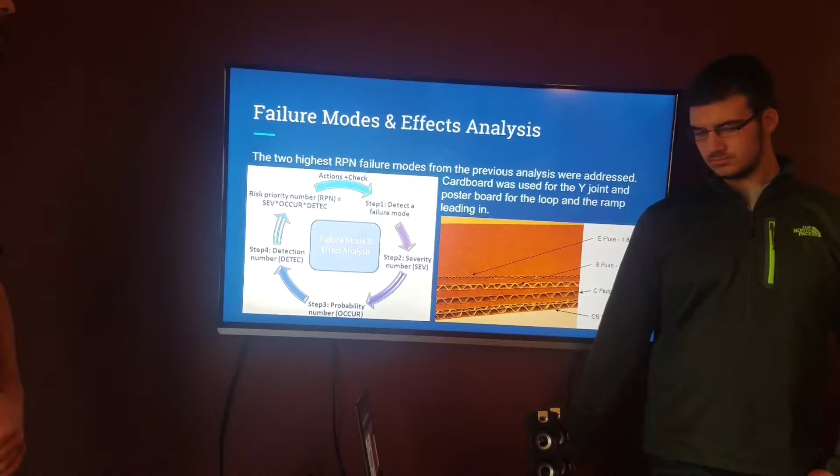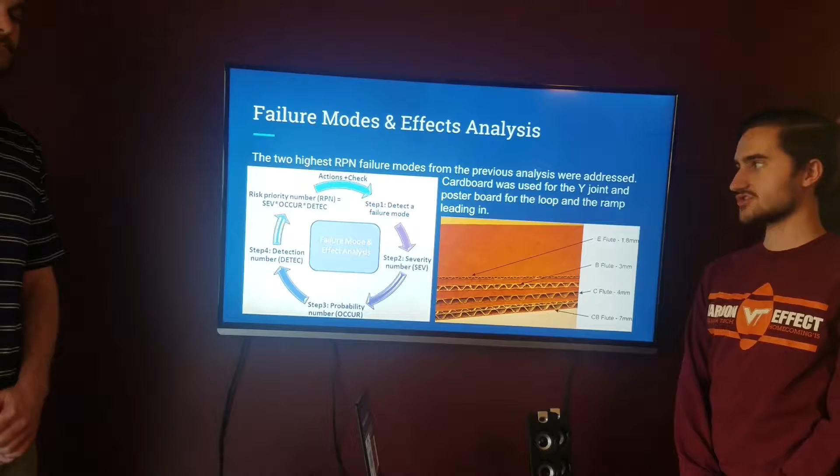The team went back through the failure modes and effects analysis with the 2 highest RPN failure modes to further address them in our BRG. To do this, we took the poster board originally designed for the Y joint and used cardboard on the base to keep it more level when the ball impacts it. We kept the poster board for the loop and the ramp leading in, so friction would be reduced in that critical area.

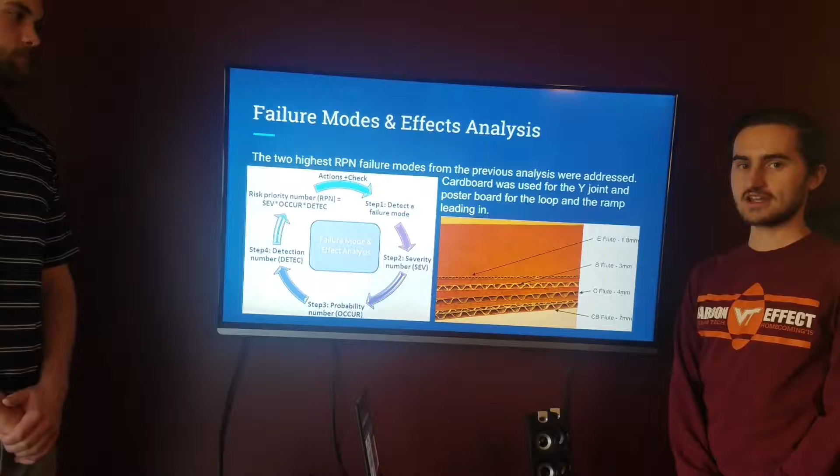One area of emphasis we took seriously throughout the project was our design for environment, as we believe most companies have a responsibility to help our ecosystem survive, since it's where we and all of our companions live.

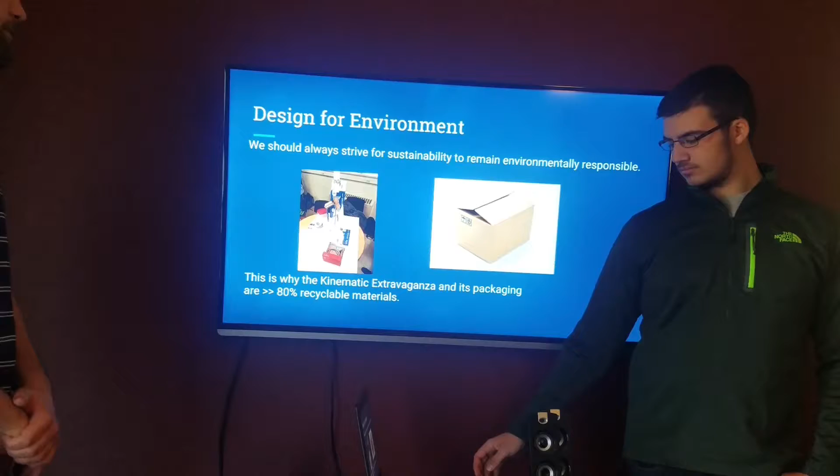We took recyclable materials into account, making our BRG and packaging components much greater than 80% recyclable by mass. Our BRG is made almost exclusively of paper products. The only things that aren't reusable to the fullest extent are the adhesive materials used to connect different obstacles and structural members, and the Arduino component. We extended that to our packaging as well, using cardboard packaging.

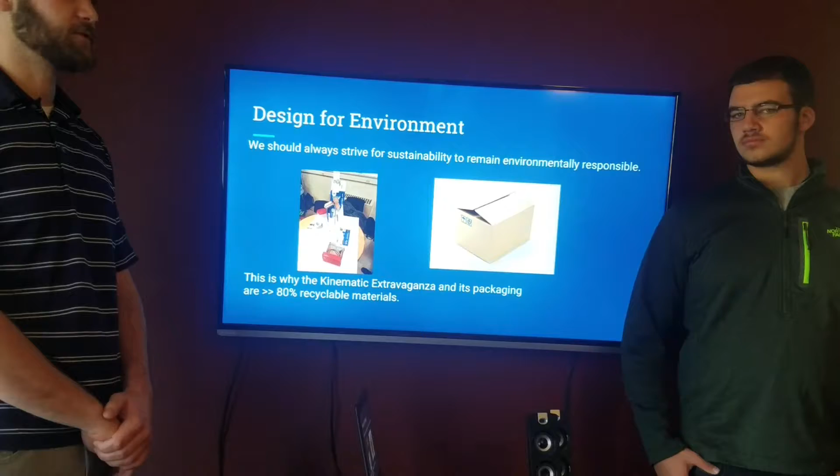Ultimately, it is the consumer's job to be sure they take advantage of the recyclability and reusability of the machine and its packaging, but we have provided the means for them to do so.

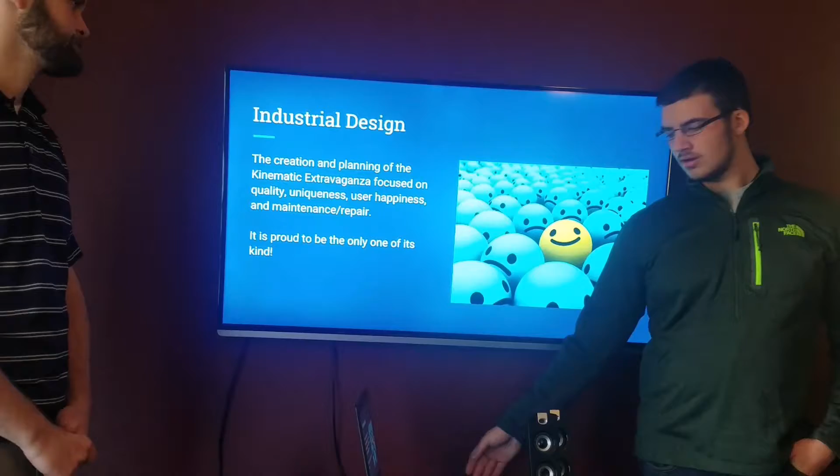For the industrial design stage, we created and planned the kinematic extravaganza focusing on a couple different categories, namely the quality, the uniqueness, the user happiness, and the maintenance and repair.

The entire BRG is the only one of its kind. There isn't a product on the market right now that uses obstacles and challenges combined with educational objectives in physics for high school students the way ours does. So that was a big thing.

We've gotten very good results for user happiness with the way we've created it, and it's good quality - very sturdy, even with the recycled materials used. Because it's a slot modular design made of recycled paper-based materials, maintenance and repair is very, very simple. This was all created to help consumers get their money's worth for buying our product.

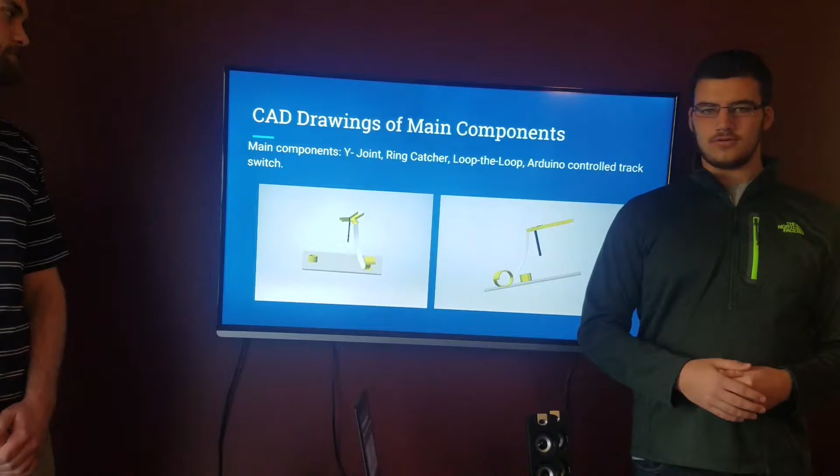For the drawings of our main components, you can see we have the Y joint, the Arduino track switcher, the ramp into the loop, and the ring catcher. This is a computer design drawing of the main components of our entire BRG.

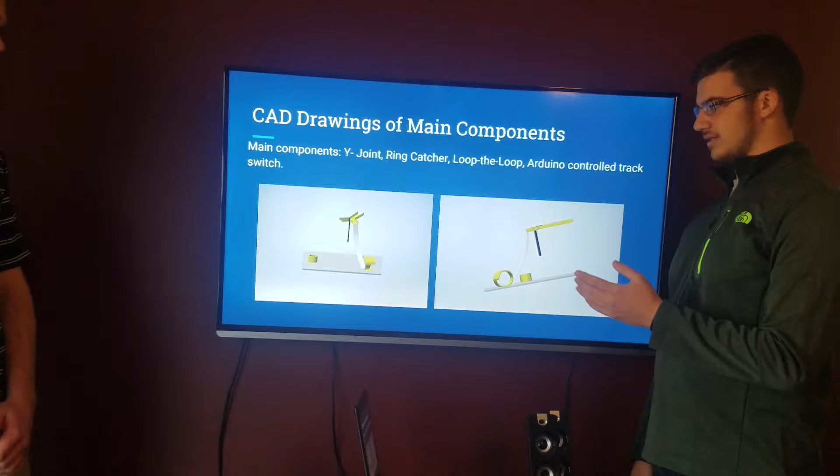The ball comes into the Y joint and travels until the track switch, where the student will have answered questions that control the Arduino and send it either right or left, which then sends the ball either towards the ramp into the loop or towards the ring catcher.

There is certainly opportunity for improvement within our design if we were to extend this product in the future, or develop it into the next generation. One thing that could be improved is the use of materials, as our design tends to have a higher coefficient of friction than we'd like, with a lot of energy lost from top to bottom.

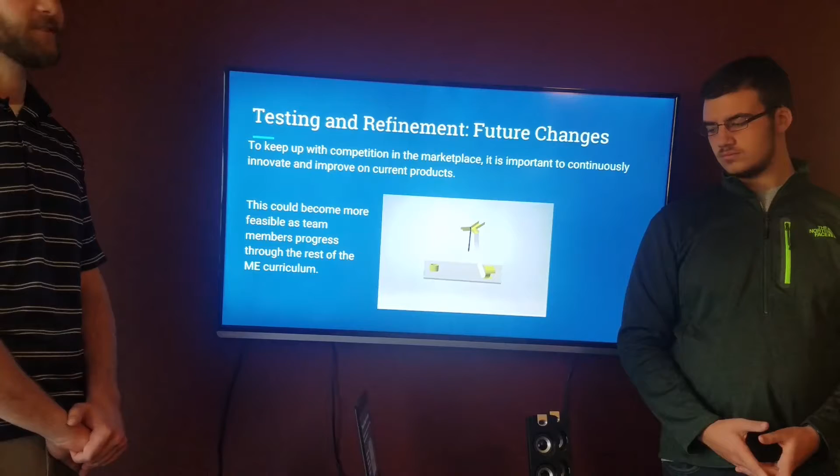There are also materials that could be more structurally sound than cardboard components, or have greater longevity, while maintaining our high reusability. As team members progress through the curriculum here at Virginia Tech, we hope to eventually learn more about these different materials and how to employ them in designs such as ours.

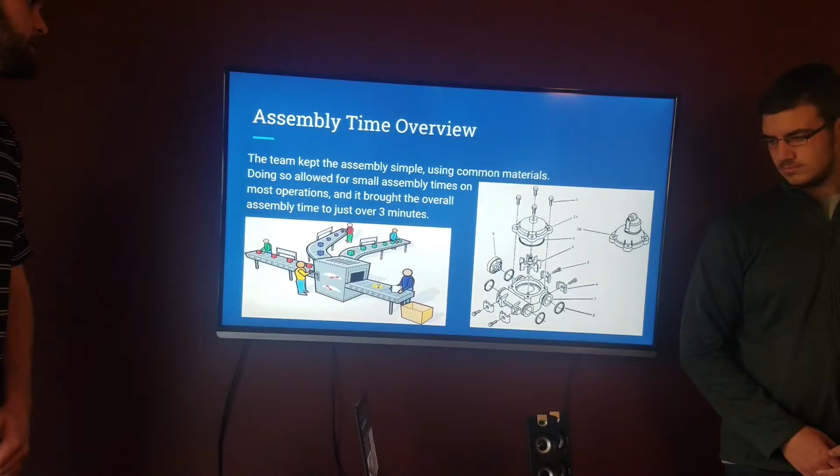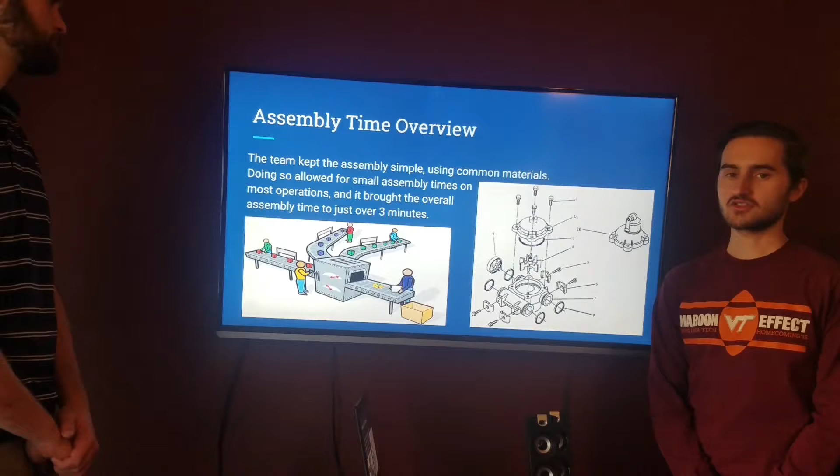For the assembly time overview, the team kept our assembly simple using common materials. This allowed us to keep assembly times low, to the point where our final assembly time was just over 3 minutes, giving us an extra 2 minutes to make sure our BRG was set up and working correctly for our final presentation in class.

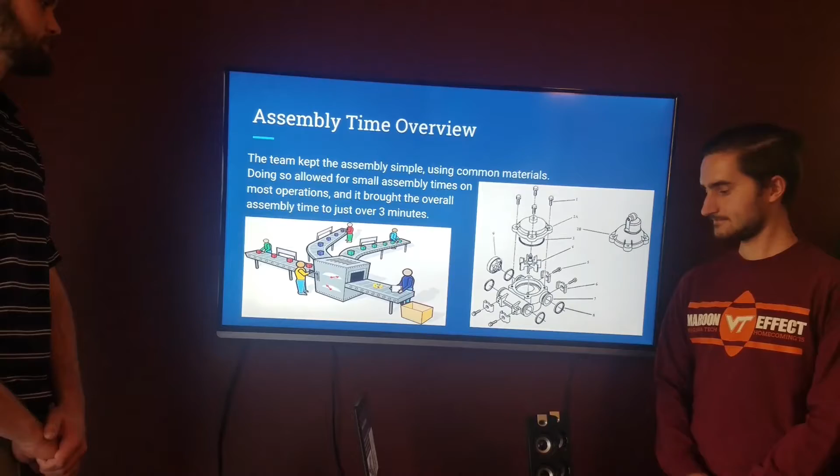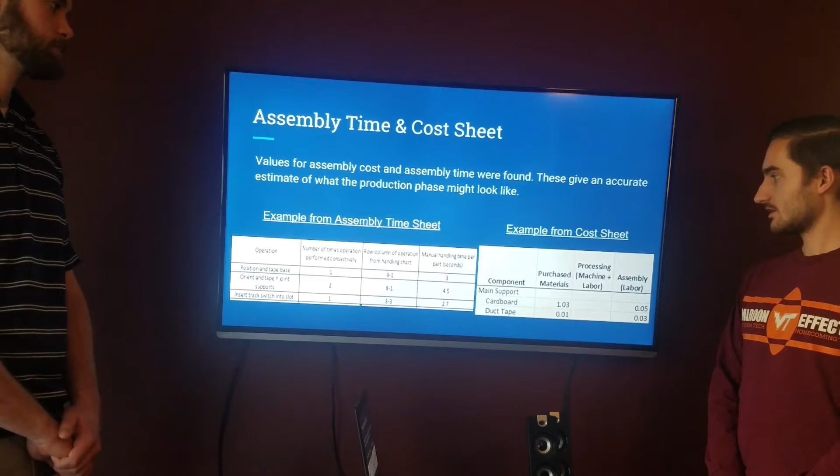For the assembly time and cost sheet, values for assembly costs and assembly time were found, giving us an estimate of what production may look like. For the cost sheet, we found the price of materials we'd be buying in bulk, since that's what we'd use on a full production scale, and estimated the labor cost for workers assembling our BRG. We also found that our BRG only cost around $4, excluding the Arduino component, in total for assembly and material purchases.